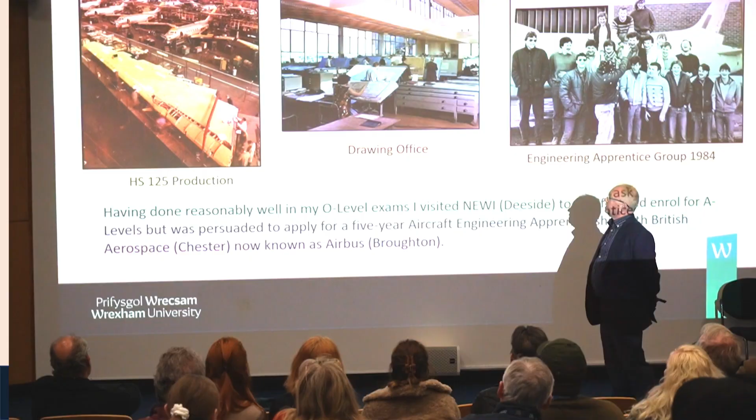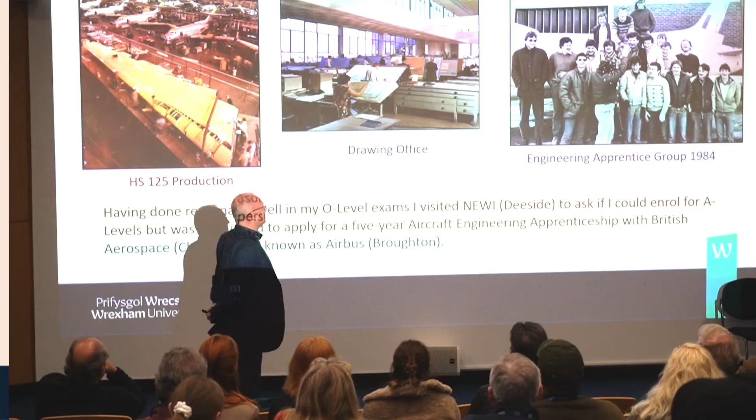And working on the track was really interesting. I worked there for 3 years, fitting engines and hydraulics and wings and riveting and drilling. And then I worked in the drawing office for a couple of years. We stood at drawing boards just like that. That's exactly what it was like when I was there. These days it's all CAD. So I used to draw all my drawings in the past and repairs, write letters by hand and send them off.

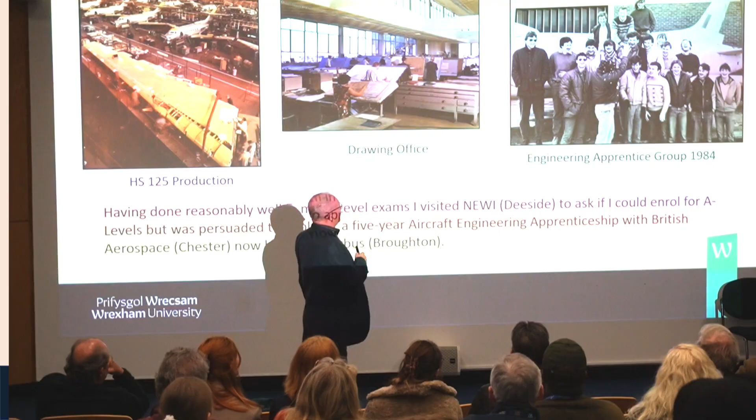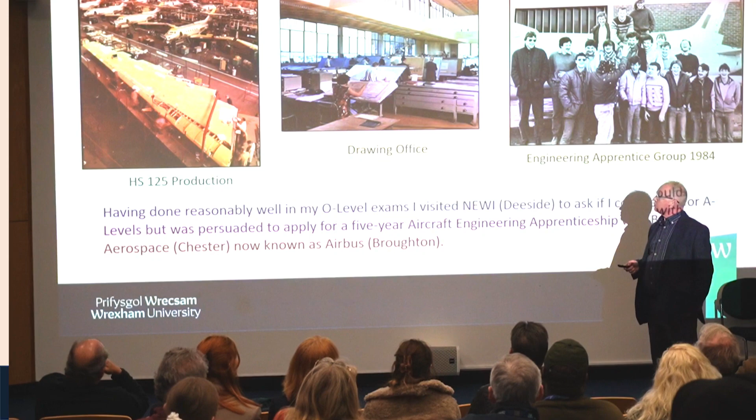And this is a photograph of myself with the apprentices I was with at the time. We're all standing on an aircraft which we had at the college called a Swift, a Supermarine Swift. That type of aircraft actually set the world speed record in the 1950s with a pilot called Twiss, who I met. I was lucky enough to meet him and talk to him.

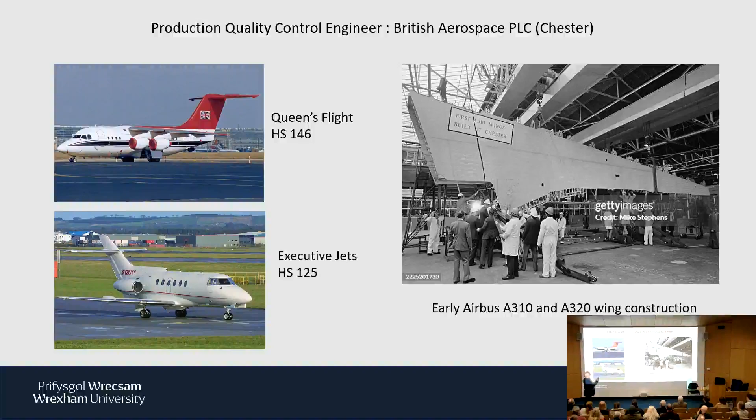When I came out my time, I worked for a couple of years, or a year and a half actually, in the factory, in an office like this office, right in the centre of the factory. It was very noisy, dusty, and there were rivet guns going off everywhere. So I spent 18 months doing that, and I worked on 3 main projects when I was there. I was the quality engineer for Airbus wings. There weren't many wings, but doing the wings on the Queen's Flight, 2 of the Queen's Flight aircraft, and executive jets. And with the Queen's Flight aircraft, which I always mention that, and people say, oh, that sounds posh.

All I had to do was turn up at an office, a Nissen hut on the side of the factory, and there was a military man in there. I'm not quite sure which military he was in, he was always in a suit. He used to tell me a whole list of things we were doing wrong, then I had to go tell the foreman what we had to change, like put barriers around it, make sure nobody's got loose clothing. Basically I was just taking a load of faults from one person to another, and it got argued at both ends. The foreman used to swear at me, and he used to swear at me too, so that's what that job was about.

So I decided to leave that job, and I wanted to get into design. I always wanted to be in design, and really Broughton's all about production, and it still is. That's why it's still there, because they produce things well. But I wanted to get into design.

In the design work I did, I knew a lot about structures of aircraft because we built them, and I knew a little bit about Kevlar and composites because they were also on the Airbus aircraft. They gave me a job in Germany to run. I was quite young at the time, I was 23 when I went out there, to run a group of gentlemen, 5 or 6 of them, to do repairs.

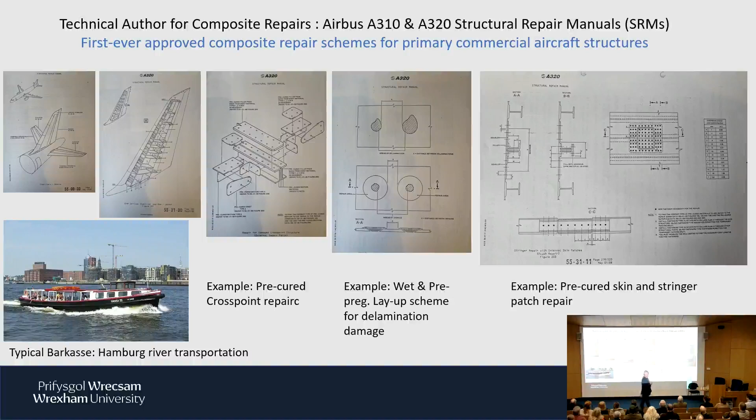I put this boat picture in here because I like boats, and I went to work and came back from work every day on a boat like that, which made the job absolutely wonderful. I was in my element doing that job.

But I got fed up with structures after 18 months. We produced two structural repair manuals, or chapters for structural repair manuals, for Airbus, which were the first ones ever for primary structure for commercial aircraft. Not knowing it at the time, but having looked at it since, all the other companies like Boeing, the big companies, have basically just copied them - copied what we would have done if they existed as well. So it's quite a good one to see.

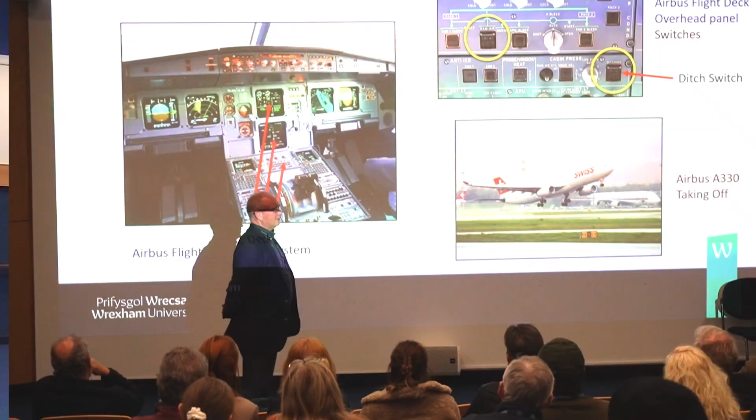So I wanted to get into systems rather than structures, and I was lucky enough to be able to transfer within MBB, which is what the German factory I went to work in was called. It's now called Airbus, but MBB stands for Messerschmitt-Bölkow-Blohm. A lot of people have heard of Messerschmitt. My grandfather, who used to be on anti-aircraft guns during the war, couldn't believe I was going to work for Messerschmitt - he said he spent most of his time trying to shoot them down, and I was going there to build them.

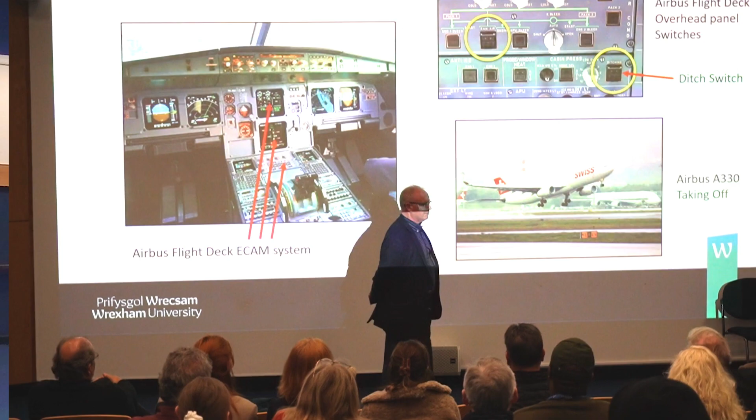What I did there was I was lucky enough to get into a group which did environmental control systems. There were six of us in the group, and we were designing them. The environmental control systems are actually air conditioning packs, in this area, and they take bleed air, which is air coming from the compressors of the jet engines.

The air goes through an environmental control system and then goes into the aircraft, and then you pressurize the aircraft by controlling how you let the air out, if that makes sense. So the aircraft's pressurized so that people can breathe when they're flying around. My job was to work on the pressurization system for the Airbus A330 and 340.

I had in particular these screens here. These are called the ECAM system, Electronic Centralized Aircraft Monitoring System, and they have about 12 different pages which can be called up. If you look at it, there's some graphics there called synoptic diagrams, and those are generated by the systems that they're actually monitoring. So all the numbers and colors are all generated by the systems.

My job was to do the 4 systems: the air conditioning system, the pressurization system, the bleed air system, and the cruise page. We had to tie those into the software, so we did software requirement documents and things like that. One of the other things I worked on was the overhead panel, which is above the pilot's head.

One of the things which I noted when I first got the job was this thing called a ditch switch, which you can see there. I didn't know what this was, and I was too scared to ask, so I did ask in the end. I said, what's a ditch switch? And they said, well, when the aircraft's going to crash on the water, the pilots have to press that switch.

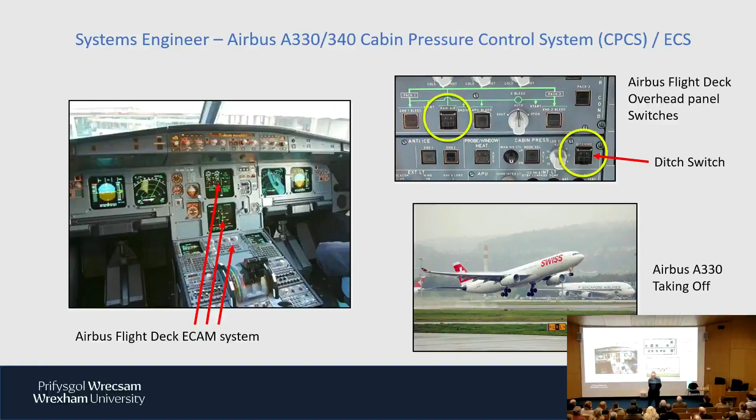I said, you're joking, right? And I thought, does that stop it crashing? And they said no, it closes all the valves which are open and closes all the holes below the flotation line of the aircraft. I thought that can't be right. I'd seen a video of an aircraft trying to land on the sea - it was a remote-controlled large aircraft, and it just cartwheeled down the sea and broke up. I thought it must be impossible to land.

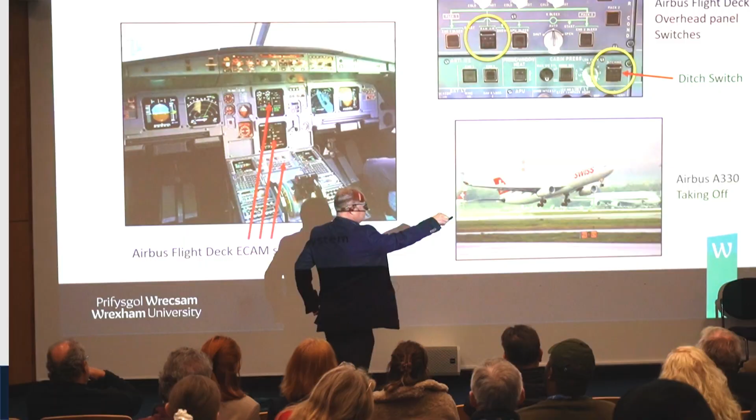We actually had conversations about it, and they did some tests on a water tank. They showed how an Airbus should go into the water - how it should go in tail first, hit the water, then slide along and glide, and then it will sink. I still found it very difficult to believe it was possible, until it actually did happen in the Hudson River on an A320.

The first thing I went to do was find out, did they press the ditch switch? And he didn't press the ditch switch. If you look at it, it sank not long after. Had he pressed it - and I thought he did a brilliant job landing the aircraft, not taking anything away from how brilliant the guy is - had he pressed it, it probably wouldn't have sunk so quickly, maybe stayed afloat a bit longer.

After that, I worked for about 4 or 5 years in Hamburg, in Germany, and had a fantastic time, wonderful people, brilliant engineers. Really enjoyed the time, really good. But after that, I wanted to get back to the UK and work on smaller aircraft.

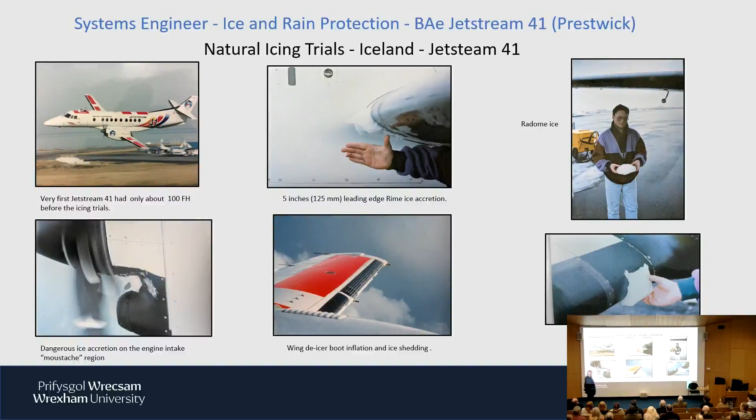I went to work on this aircraft called the Jetstream 41. When I went there, it was a blank piece of paper. Within 2 years, about 120 engineers had designed this version of the Jetstream, which was extended. This was the very first aircraft to fly - that's flight number 1, or aircraft number 1, the production test aircraft.

And it had to be tested in icing conditions. My job was to design all the icing systems for it, ice protection. I wondered how I got that job, because it was really quite an important job to get at a fairly young age - I was about 28 when I got this job.

I realized within no time it's because it's dangerous. What you have to do is, after you've designed the ice protection systems, you've got to go to Iceland and fly in clouds between Iceland and Greenland until you've got loads of ice on the aircraft and see if your systems work. I was 28, and I was one of the oldest people on the aircraft. All the other guys were much younger, except the pilot, who was 32.

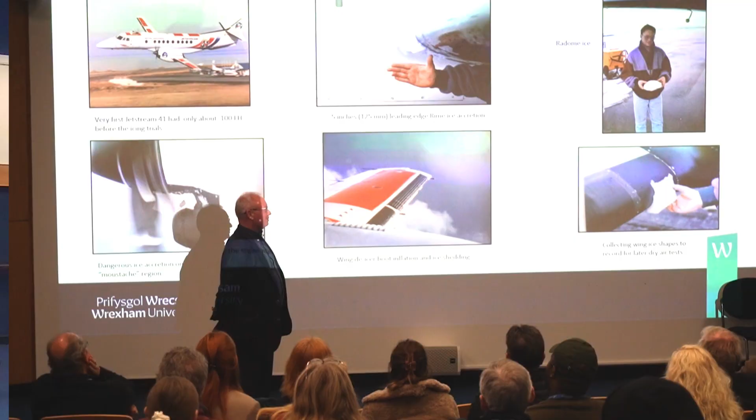But he was always in the pub. Not to bring it down, he was an excellent pilot. They were a really good crew.

Just to give you an idea of what we're doing, there's some shapes here. We used to fly and get 5 inches of ice on the aircraft and 1 inch on protected areas like this, and then operate the systems to see if they worked. I had to log all the droplet size in the atmosphere, the temperature, the speed we were flying, the altitude we were at, all these things.

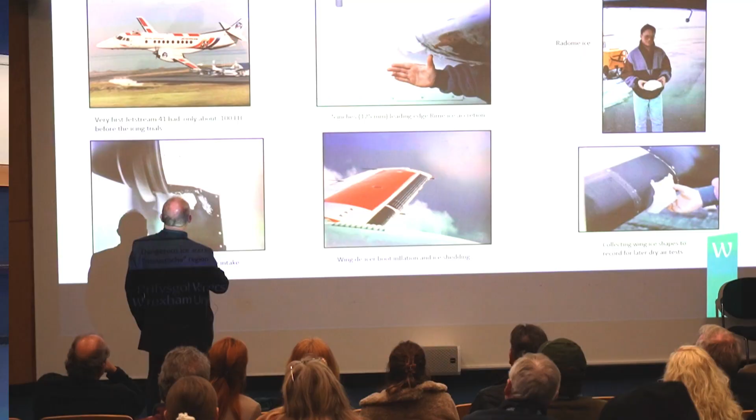And we had to fit it with instrumentation beforehand. If you look at the top of that aircraft, it's got a thing sticking out, which is called a Knollenberg particle detector, a laser-type particle detector.

So flying on this aircraft, there were a few things dangerous. There's a dangerous ice accretion here. This is a story which I learned a big lesson from. I designed all this area to be heated, and that's why there's no ice on it.

And I designed the heating to go around this area as well. But I was in a meeting - to do that takes a lot of energy and a lot of air out of the aircraft. I was in a meeting with two guys, the chief engineer and the technical director, and they said you can't have that much air, so cut that bit. We don't get ice there on the Jetstream 31, cut it off the 41. So I did - it was already built into the structure, but we cut the air supply to it in the design.

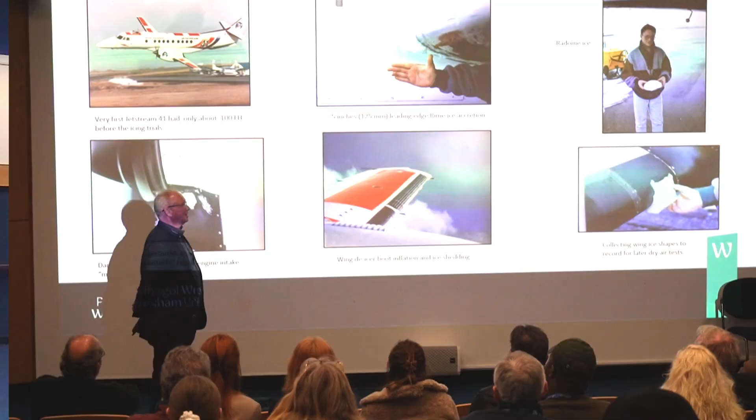And then we went flying, and it just started to accrete ice. I remember looking at it through the window - I'm actually on this aircraft in the pictures taken here, about halfway down the cabin. I was looking at it thinking, I knew that was going to happen, but I haven't done anything about it. And it happens on both sides, so I've got ice on both sides, and I know the amount of ice on the aircraft then was enough that if it went down the intake, the engine would get damaged.

So I called the pilot to come and have a look at it. He came over, and we were both watching it, and it just rattled loose and went down the engine. We heard a crash as it went down the engine. The engine wound down and then shut down, and the whole aircraft slewed and fell quite a few thousand feet. By the time I'd got back into my seat, the pilot had already got back into his and pulled the aircraft out, and we were about 2,000 or 3,000 feet above Surtsey in the Atlantic.

So yeah, that's the Empire Test Pilot School for you. They were really quite cool about it. But we went back and fixed it, and the engine needed repairing - we had to change the engine, actually. So yeah, quite exciting times.

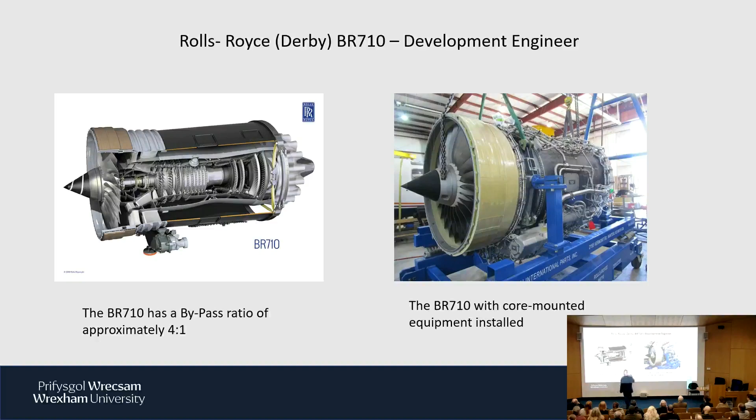The stuff I worked on was none of that - it was all the stuff on the outside called the core-mounted equipment. So I worked on all those systems, and that was really interesting. But we learned a lot about how these engines work and the design of the blades and such like.

And then I got another job which involved an engine. When I was doing these jobs, I'd actually started my own company by then, through consultancy, and I had other folk working for me so we could take on larger jobs. This one was a reliability study. By that time my wife had got an HND at NEWI in mechanical engineering - she's very good with mathematics and figures, and she was doing the reliability calculations for this while we set up the systems and how they worked.

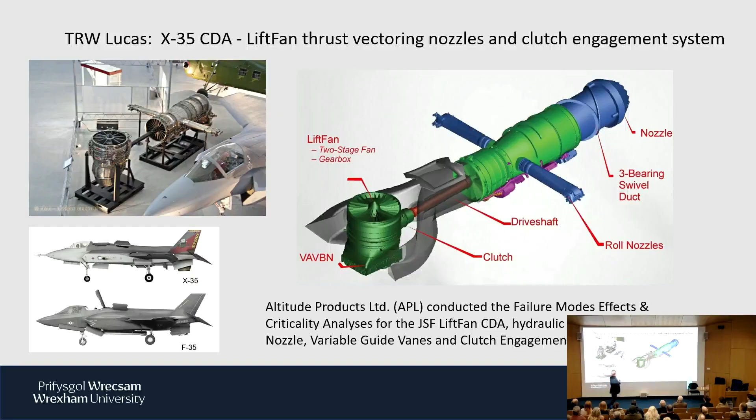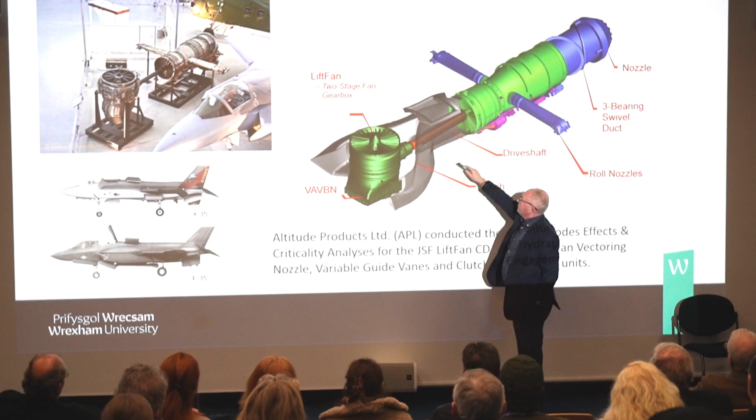This is, if anybody knows what a JSF fighter is, the F-35, they're actually in operation in the Air Force. This is essentially how it works, and this isn't top secret at all - you can get this on the internet. There's an engine, and it drives a shaft into a clutch, and it drives 2 fans.

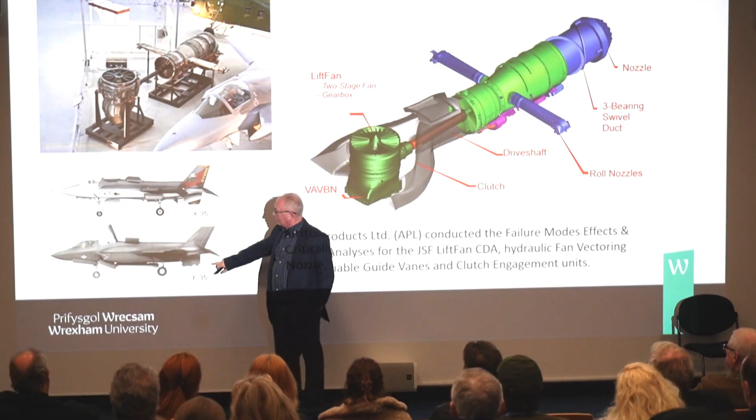And the fans contra-rotate, and it produces all the thrust for an aircraft to take off vertically. And there are two types of aircraft. There's the F-35 that you might know now, but before that there was the concept demonstrator aircraft, which only had to fly for 150 hours.

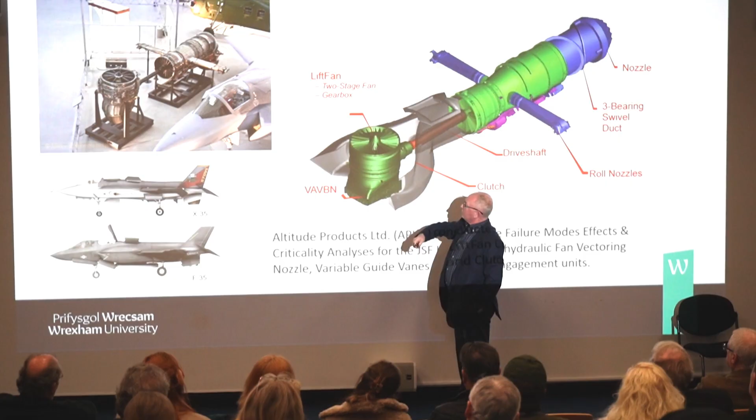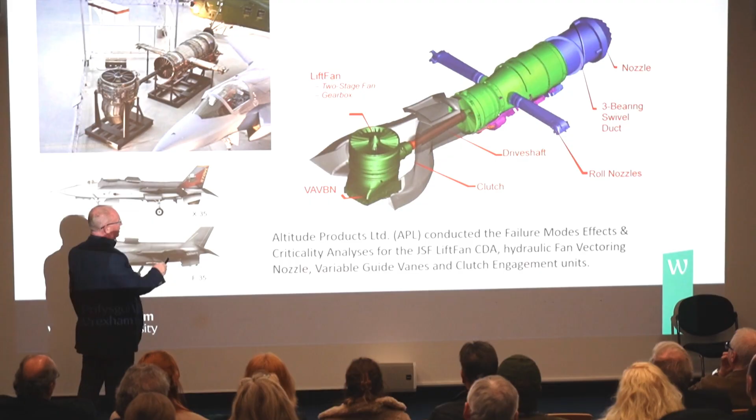This is the one I worked on back in the late 90s. My job, or the team I had working with me at Altitude Products, my company, was to do the reliability studies and design input into the clutch engagement unit, the fan vectoring nozzles, and the variable guide vanes for the jet engine. Those units, that was a really interesting job, but it made me think about the vertical takeoff and the fan arrangements, and that will come in a bit later.

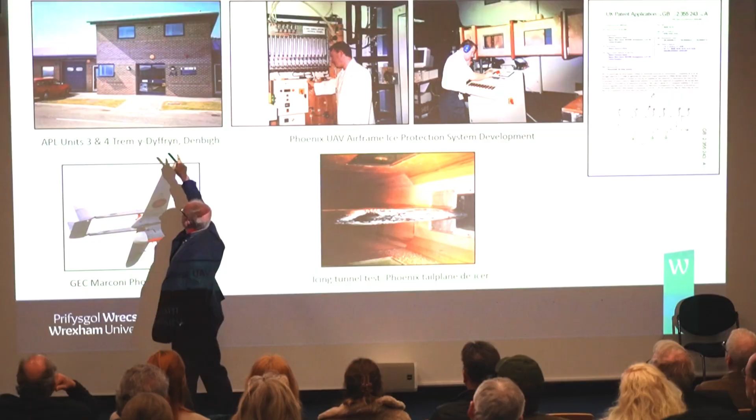So as I mentioned, Altitude Products, I had a company based in Denbigh, an industrial estate in Denbigh. We had all the offices here for design and calculations and whatnot. And this unit alongside was a machine shop where we made components for aircraft.

The sort of aircraft we worked on, there was the first unmanned aircraft I started working on at that time, which was in the Army. I did de-icing systems for it, because the MOD asked me to design a de-icing system for the Phoenix UAV. The Phoenix UAV was an awful unmanned aircraft. It was too heavy, too slow, too loud, and really expensive. By today's standards, it's a really bad aircraft, and they've got rid of them now. But the thing is, they used to crash a lot because they used to land on a parachute, and more than ever got blown into trees.

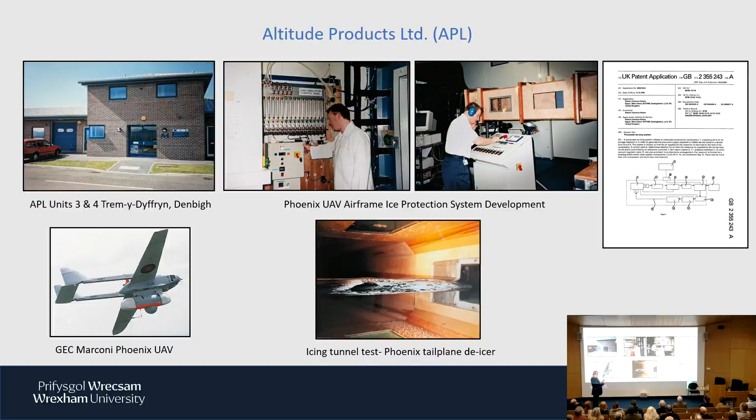And so they were damaged quite a lot. You can see here the chap who used to work for the company, called Chris Bluff. He was a student here at Wrexham University, and I took him on in the company to work with us. We're testing a de-icing boot, which is on the tailplane of that aircraft in this picture, and we patented that system.

And then I worked on an aircraft project called the Boeing Sonic Cruiser, and that was the first more electric aircraft. So the jet engines drove electrical generators, which we used to drive the air conditioning systems and all the power systems. And that way, it gave me the idea of looking at more electric propulsion. So that and the lift fan project were formative in the research which I was going ahead with.

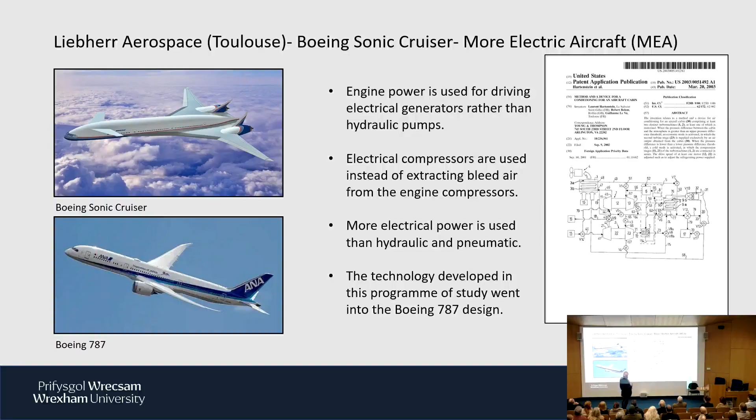The final job I worked on in the aircraft world and industry was actually the Nimrod, which was built at Woodford. It was the last aircraft to fly out of Woodford, and it flew in August 2004, took off and flew out of Woodford, and they closed the airfield down after that, and now it's a housing estate. And in September 2004, I started working at Coleg Cambria.

Some of the research I'd started to look at by then was rim-driven fans. Because of what I'd seen with the lift fan, I thought it would be better if it was electrical and not mechanically driven. And looking at the work like that.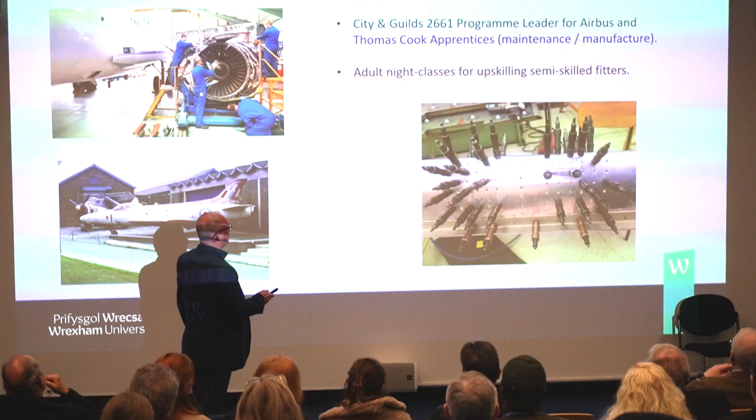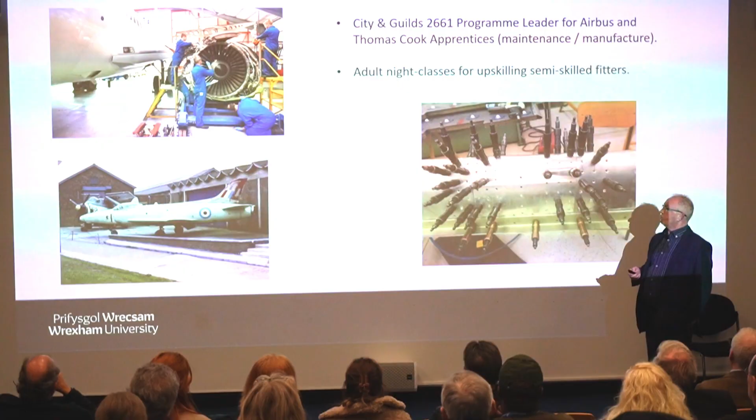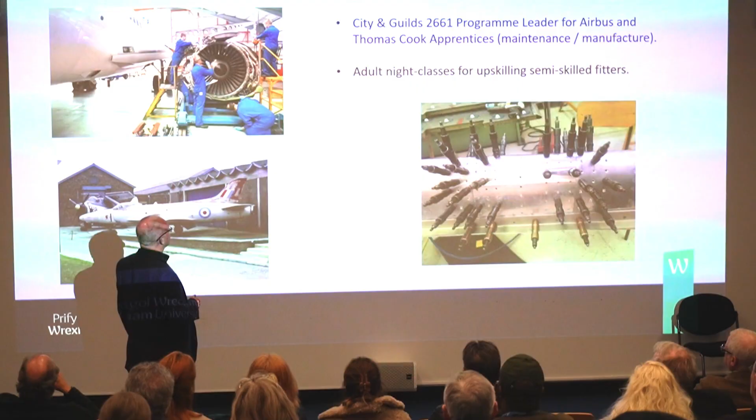And then I thought I'd spend some time with my family, having more relaxed time as they were growing up. So I took a job in further education, put more back into the apprenticeship program that I came through on. I worked for 9 years heading up the City and Guilds program for the Airbus apprentices and Thomas Cook apprentices. We did maintenance and craft apprenticeships, and I also taught on the HND programs there, which were run through this university.

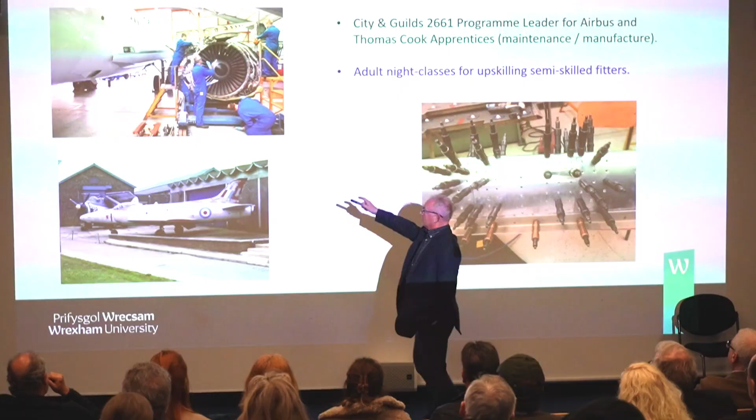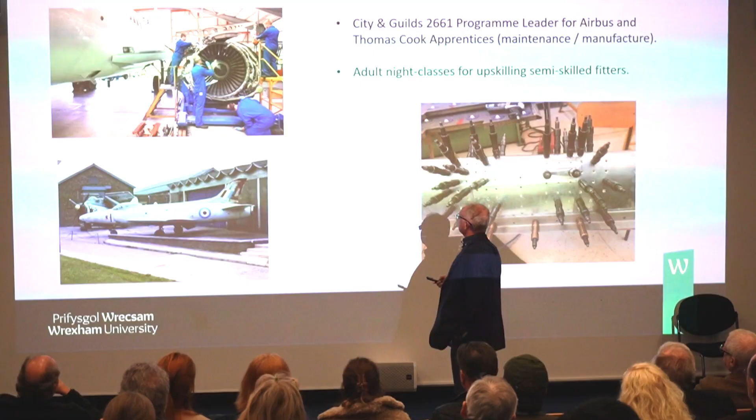So when I moved to Wrexham University, one of the things which became evident was that unmanned aircraft were going to be prominent. So I set up an MSc course on unmanned aircraft. And for each course I made, I had a funding model—how's it going to be funded? This is just to give you an idea of what a funding model looks like. You don't just do an MSc module or MSc course; it has a life of its own.

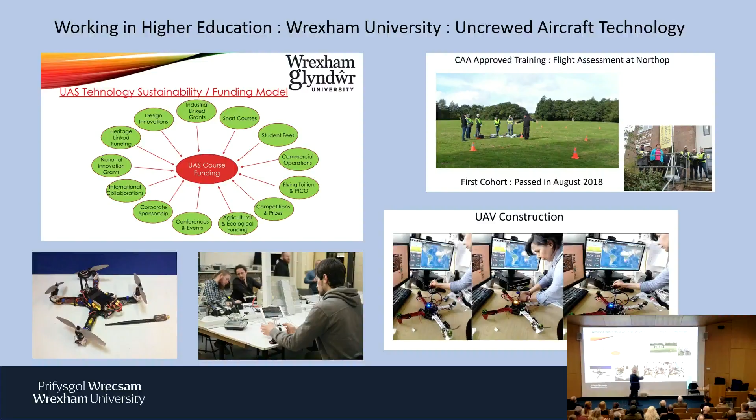We taught people how to fly drones when they needed PfCOs up at Northop on the flying fields. We taught lessons on navigation, and we taught them how to build drones. These are students here at Wrexham building drones, and this is a lecturer who used to work at Wrexham programming a drone.

And then we used to interface with STEM events and industry, with the local environment, people doing 3D modelling of Moel Famau, for instance, up in the Clwydian Mountains. We did the first 3D model of that. And competitions - here's the unmanned aircraft competition.

This gentleman here kindly sponsored us in this competition, and he is here in the front row today. Thank you, John. And this lady, Sue, who's not here at the moment, she also sponsored us - she ran an insurance company in Liverpool.

And we did conferences as well. Oh, here we go.

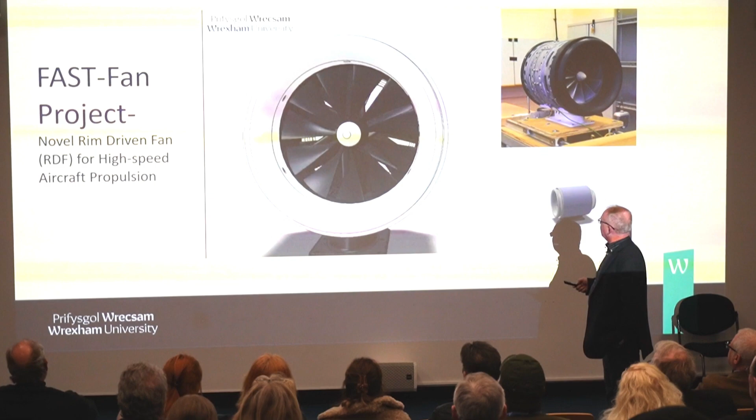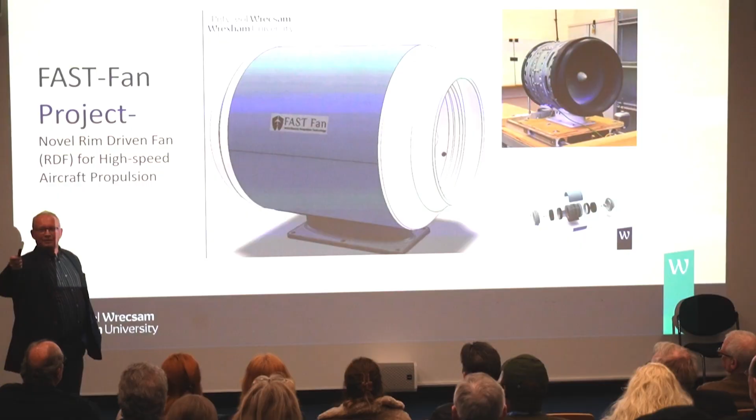Well, this is the Fast Fan, and it's a project which we've done here at the university, and we're very pleased and proud that we're getting somewhere with it. In the room, I think Paolo at the back worked as a research assistant on this, and now works full-time in the university.

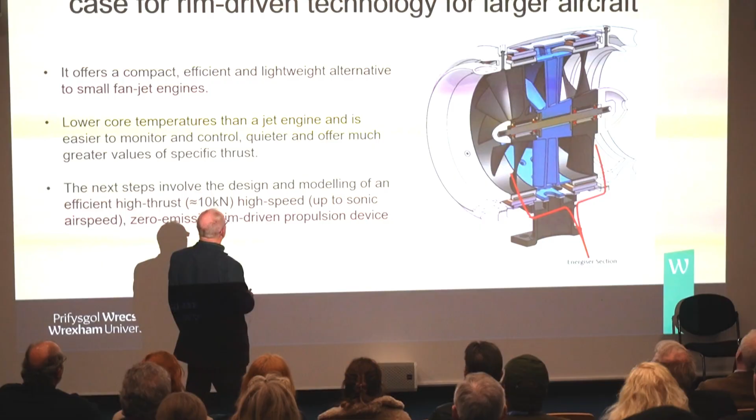And this is what it looks like inside. So if you look at this blue part, that's an interesting thing to look at the moment. That's called the stator, and it supports 2 fans.

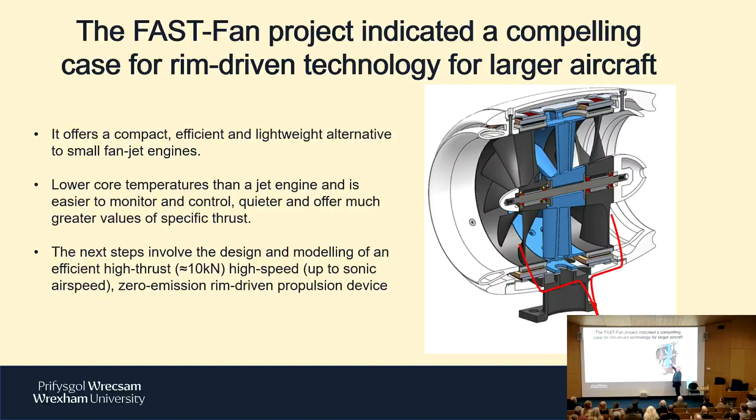Just to give you a rough idea how the fast fans work, the motor's on the outside, so they can be cooled down easier, and they can put more energy into the airflow. So the energy comes into the air, flows through the engine. You can put energy into an engine through the fan - it's a very good way to do it. And the contra-rotation of the fans makes sure it's done very efficiently.

But that's led us on to the area we're looking at now, and now we're really talking about the research areas we're doing a lot of work in. One of the projects we're looking at is a thing called an electrothermal fan engine. Instead of having two jet engines, you replace the 2 jet engines with 2 fans, and you have 1 jet engine.

So you've got 1 engine that's burning fuel. The thing with the jet engine is that all the air that goes in - if you remember, there's a bypass ratio - some of that air goes through the engine and gets burnt with fuel, and the exhaust gases get mixed up with the air as it comes out the back. What we want to do is get rid of that and avoid that.

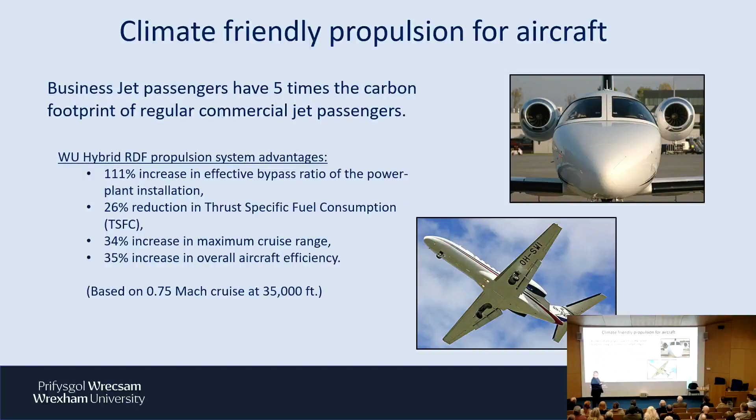So the way we do it is to have pure air coming into the jet engine, and pure air coming out the back. But in the middle, we have a jet engine running generators, which run the fans, and the exhaust heat, which is normally wasted on a jet engine, is captured and fed into these jet engine stators - into this blue part, which is hollowed out and is a type of heat exchanger.

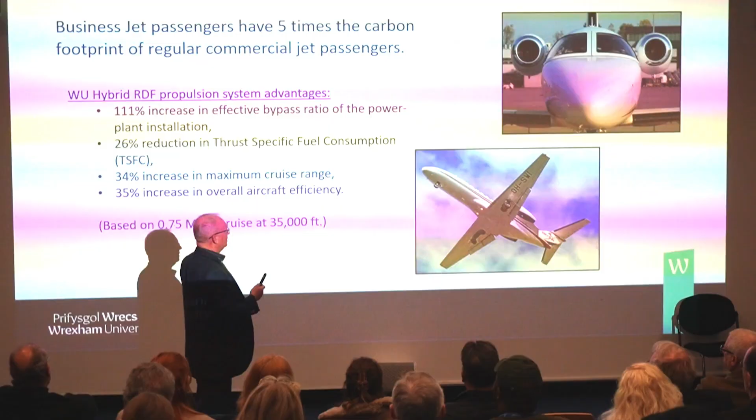And that's got really good advantages. One of the big advantages is that the aircraft looks the same. If you were a paying customer, an airliner or an operator, if you had a business jet, you could make a business jet with the electrothermal fan engines. Although it's only got 1 jet engine, it would look the same. And it would be safer, or just as safe, as existing business jets - we can prove that through reliability studies.

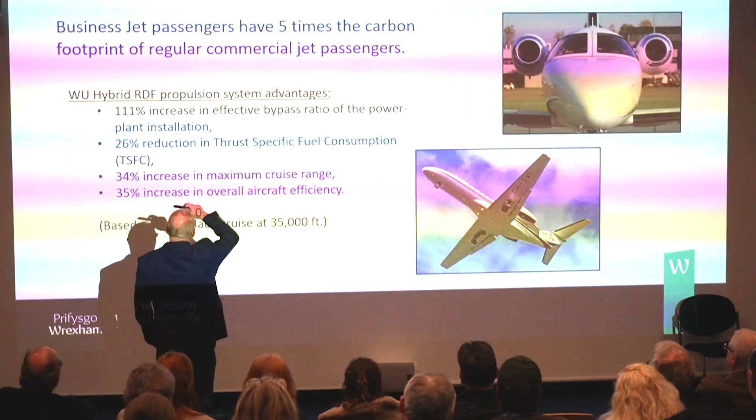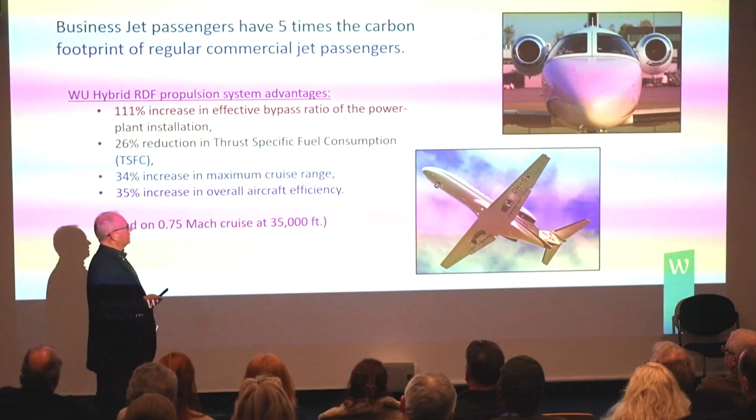So our calculations show that for this type of aircraft arrangement, we can get about a 111% increase in effective bypass ratio. That's because we have 1 jet engine now with 2 fans, not just 1 fan, pushing a lot more air back. That's important in aircraft propulsion because the high bypass ratio gives you high propulsive efficiency.

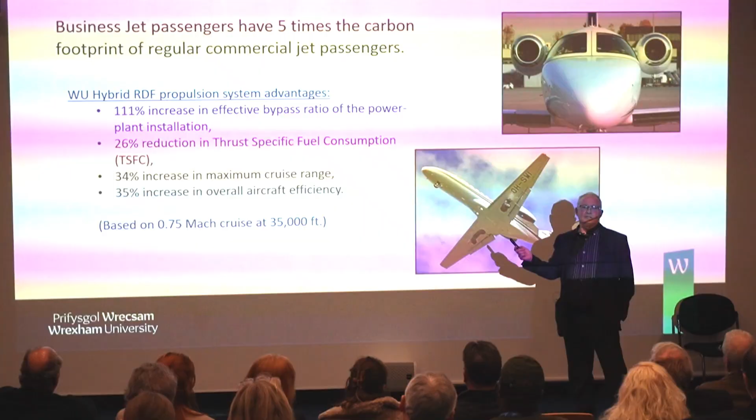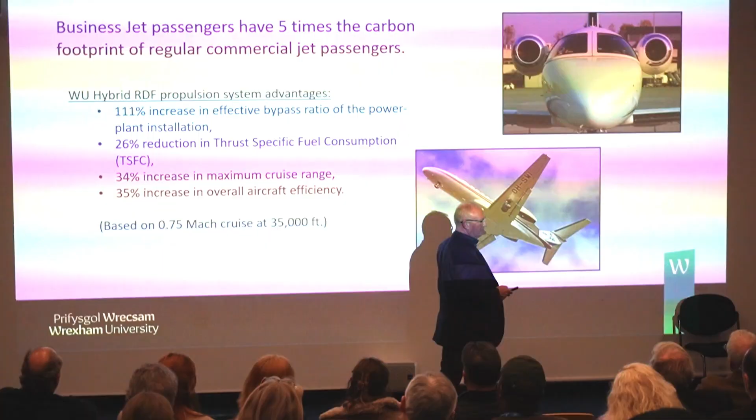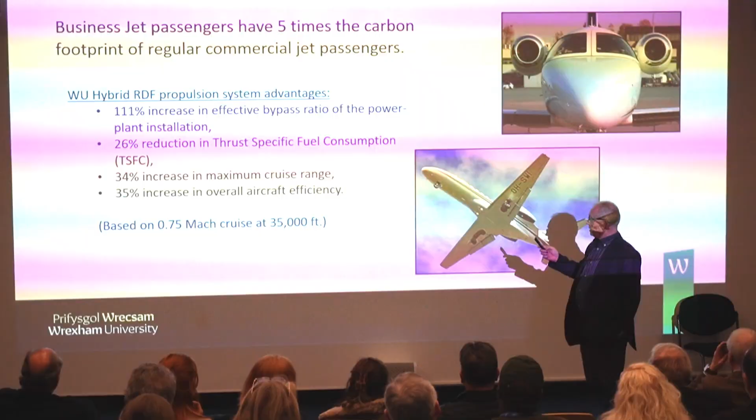And this is how it works. The air comes into the first fan, goes through a heat exchanger, goes through the second fan, and gets accelerated out of a nozzle - and the air coming out of the nozzle is supersonic. In engineering, we look at that as a heat engine, using heat engine cycles in a way looking at temperature against entropy - temperature-entropy diagrams.

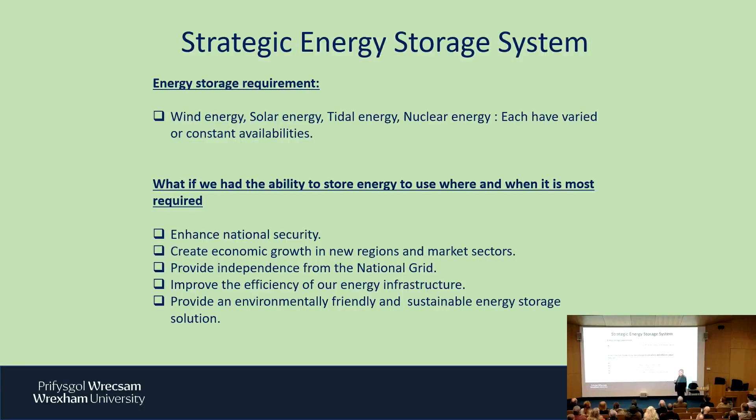So what else are we looking at? Strategic energy storage systems is another area we're looking at. In this day and age, it's really important that we can store energy and use it when we want it. So what's a practical way of doing that?

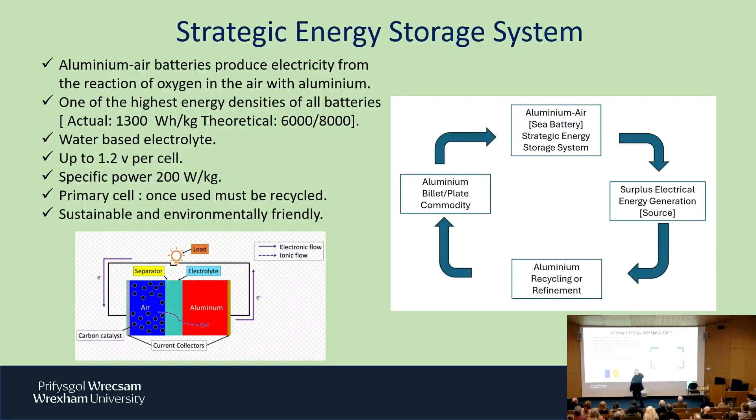Well, a practical way of doing that is using aluminium, which is a metal I'm very familiar with because I've been working with it all my life. What we can do is use surplus energy that we generate through tidal energy, for instance, or wind energy, and make aluminium billets out of it, but make them in a way that we can use them in batteries or fuel cells. It's the same type of thing.

It's called a metal air battery. The beauty of using aluminium is it's got very high energy density, it's light in weight, and it's the most abundant metal in the Earth's crust. The electrolyte we can use can be salt water, like seawater or concentrated seawater, and then we use air and carbon. So they're all very, very friendly elements which are very accessible.

This can be used to store energy as metal plates, and they're also a commodity on the market which is actually going up at the moment. We could make large batteries in containers, just like shipping containers, and stack them and put them together in series and parallel. A large amount of batteries that you'd see on, say, a large container ship would be enough to supply a town for about a month, or an island, and you can ship them around.

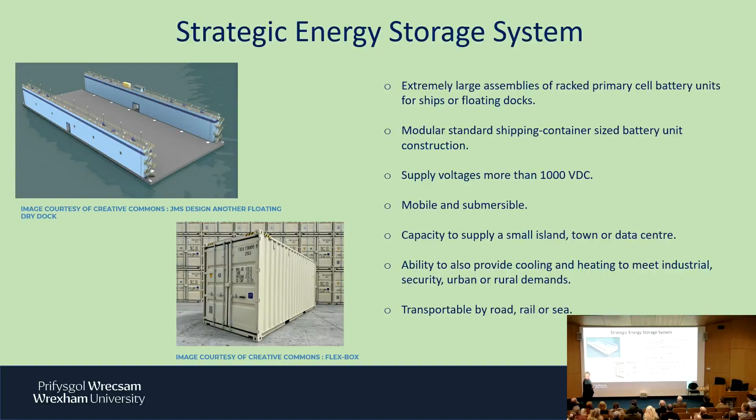So looking at future challenges now and where we're going with engineering, I have two main thoughts. One is more to do with the political environment in which we live, and the other is to do with artificial intelligence, which is on everybody's lips these days and how we're looking at it.

From an engineering point of view, I see artificial intelligence as being something we should embrace and really work with. It's really important to do that. I think we've got to get ahead of the curve with artificial intelligence, not just wait till it comes along and determines our futures. A lot of people look at it like the genie's out of the bottle, and you can't really put it back in. So looking at it, I see there's 4 main areas in engineering.

One is to do with application, which I think lots of people could buy into quite easily. We use CAD packages, FEA packages, CFD packages, all ways of calculating things. These could be automated quite easily. You could have a CAD package where I just speak to someone and say, design me a fan, and the machine would design it. Then I could say, I want this pressure rise, or I want this diameter, and it would design it, because all the information is available to do that, and that's what we do.

So the application's quite easy to do. To validate that, we'd need some kind of independent AI that validates it, because you've got to make sure that what you've got makes sense and the design is real. So independent verification of AI is required, and it's an area that can be worked on.